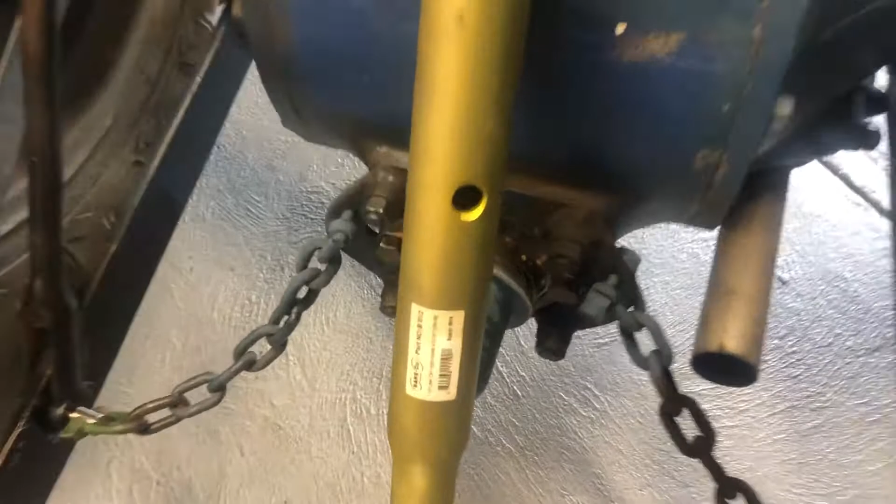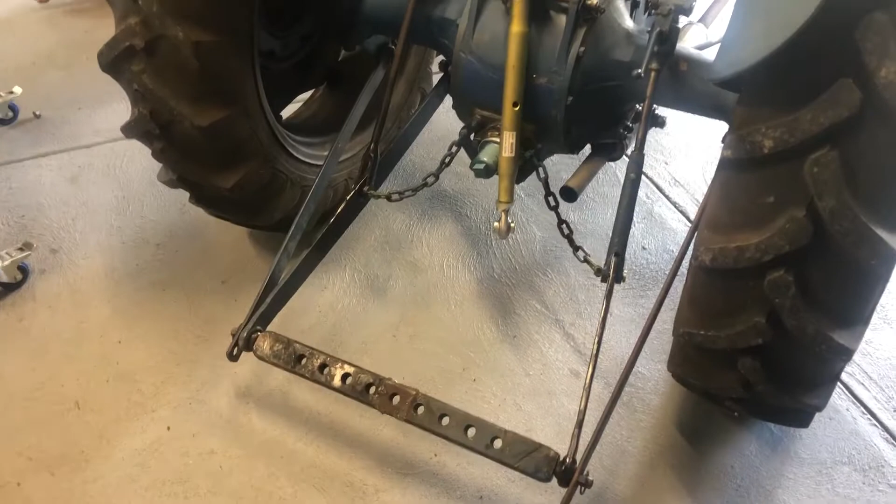At the moment, we're just getting it working. She's running a treat. We tuned it all up, changed the oil, fixed a few leaks, fixed the PTO that was leaking, put a new top link on it, fixed up some of the pins on the 3-point linkage, so it's all working. There's plenty of videos on that sort of stuff already, so I didn't bother filming all of that.

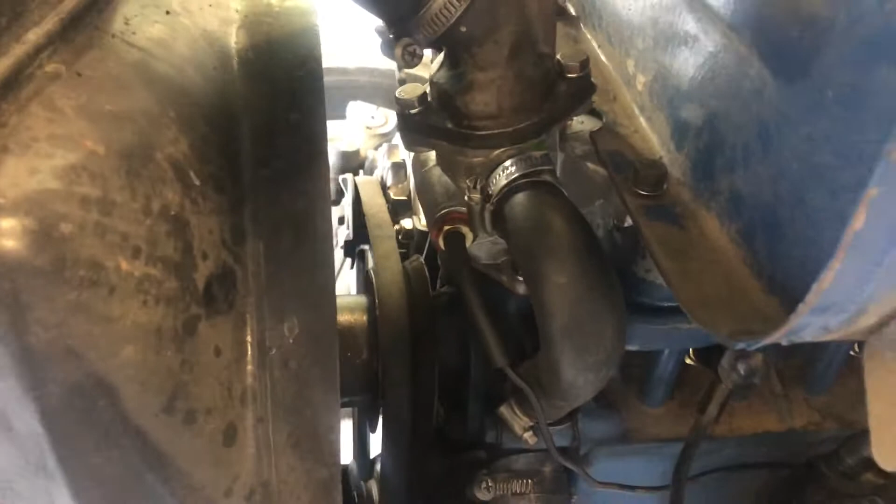Put all new hoses, all that sort of stuff on it, new thermostat housing because it was eaten through. Tuned it up, it's running absolutely terrific.

But what we're going to do is make a carry-all for the back of it, and you can get plans off the internet really easily, and they also give you a list of what steel you need to cut and how to join it all.

So we got all the steel cut up. That's the main frame, the 75mm RHS, and the other bits and pieces that go with it. Bought some pins for the lower 3-point locations. I just got to make the top one.

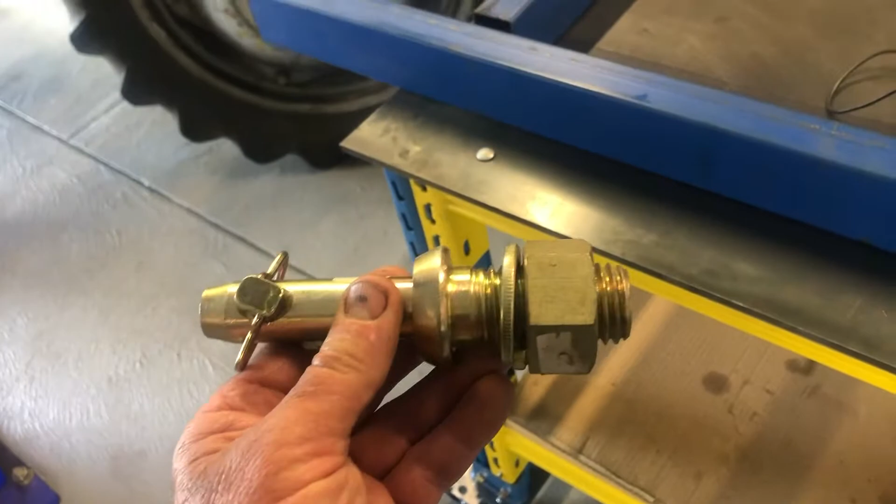So yeah, we're going to follow the plans, cut it all up, weld it all together. I'm no welder, we'll just MIG weld it. We've got the MIG welder there, and we'll make a little carry-all for the tractor.

So here it goes. As I say, I'm no expert at this, so we'll just play it by ear and see what we come up with.

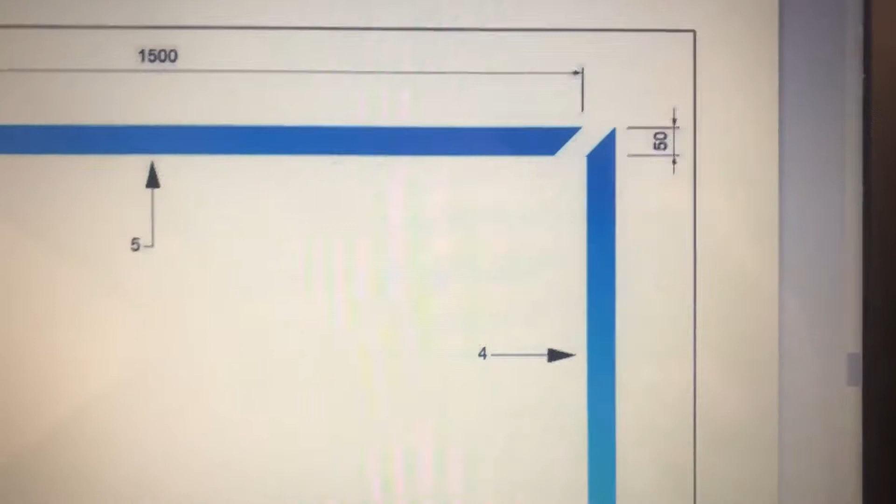The plans call for the 75 by 50mm RHS to be cut across that angle, 45s. So that's what we've got here. Obviously we've got to cut that at 45, cut that at 45. So we'll start by marking it all out.

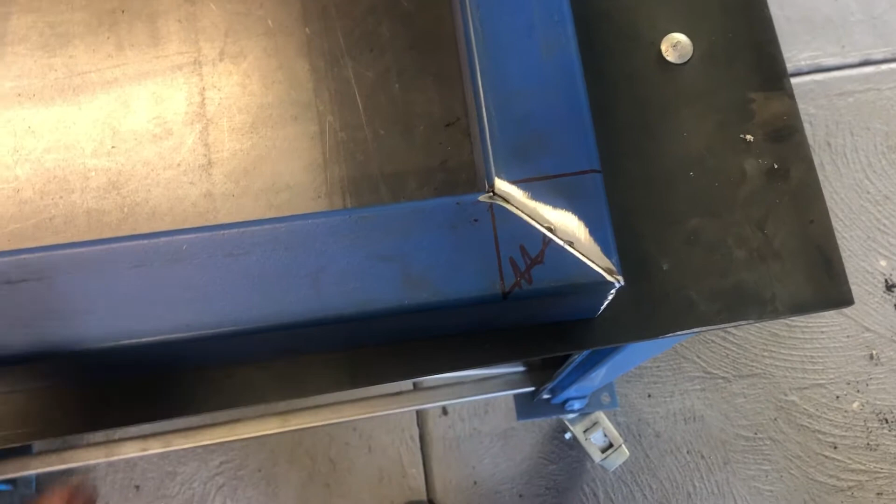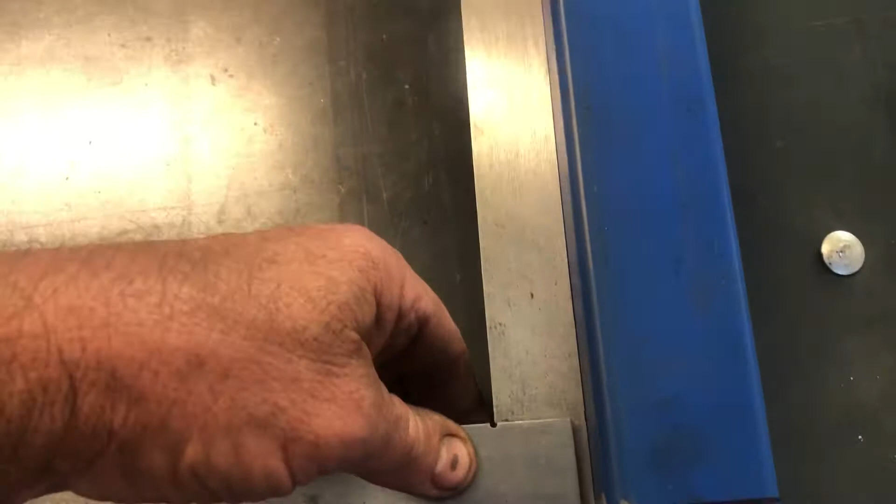Well, that's those angles cut, tubers. Here's an example of measure twice, cut once - I nearly cut it the wrong way. Not that it would have been a huge problem, I just could have turned it over, but yeah, always double check your measurements. I haven't welded anything yet, but it's going to come up fairly square, should be a little bit of a gap there, but we can fill that with weld, it'll give us a bit of penetration. Same thing at the other end.

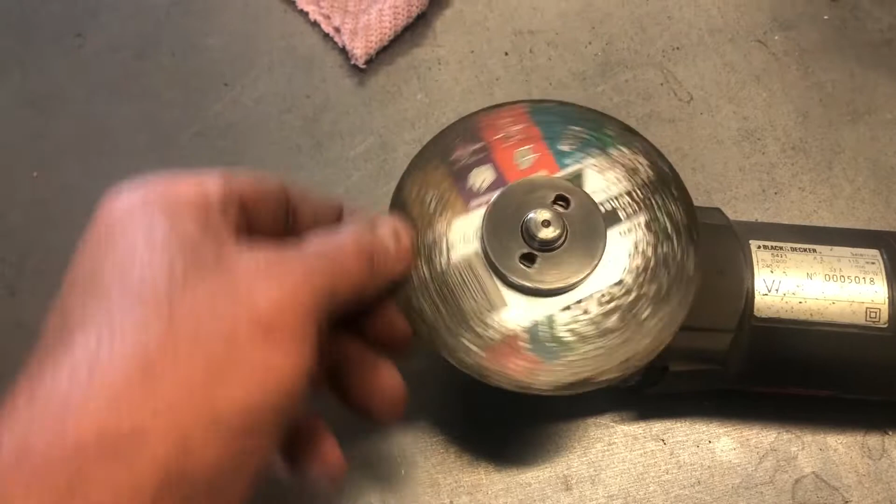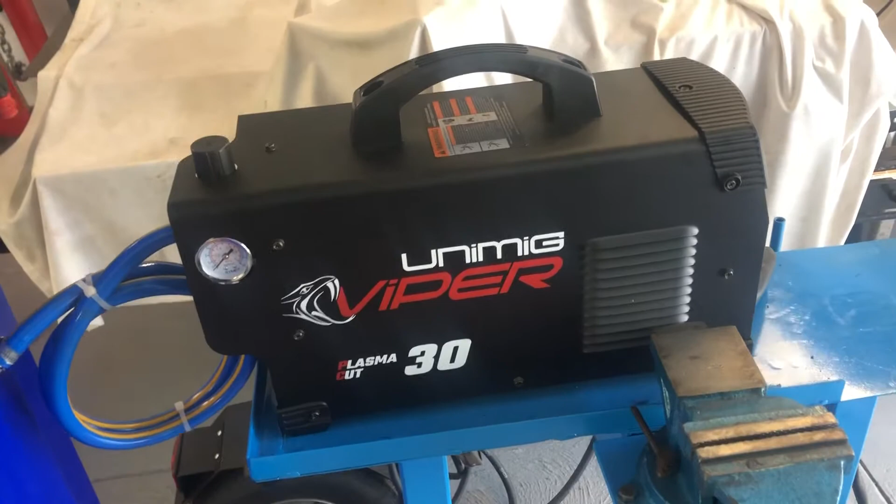All I cut it with was an angle grinder with a 6-inch or 4-inch disc, whatever they are. That's the only thing I've got that can cut steel, other than the plasma cutter. The plasma cutter is fantastic, but you need a pretty steady hand, which I don't have. So I thought I need it to be pretty accurate, I'll mark it all out and do it with the angle grinder - I've got a bit more control.

So we'll go to the plans and we'll see what's next.

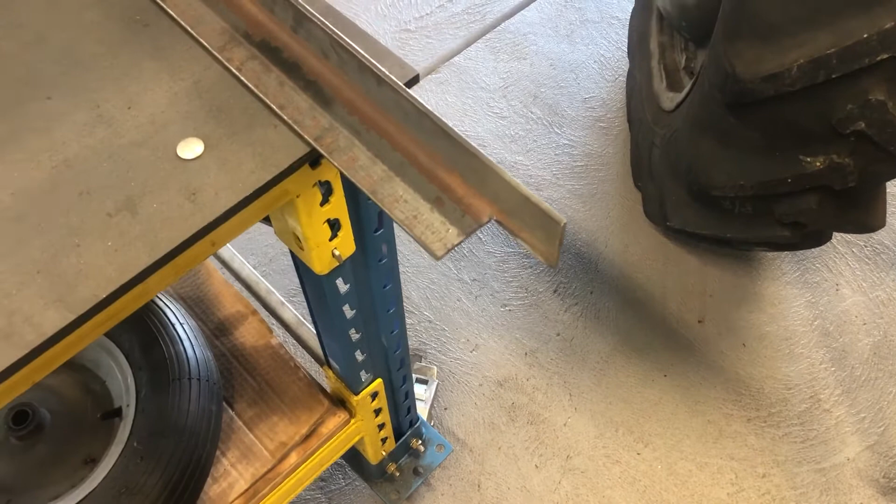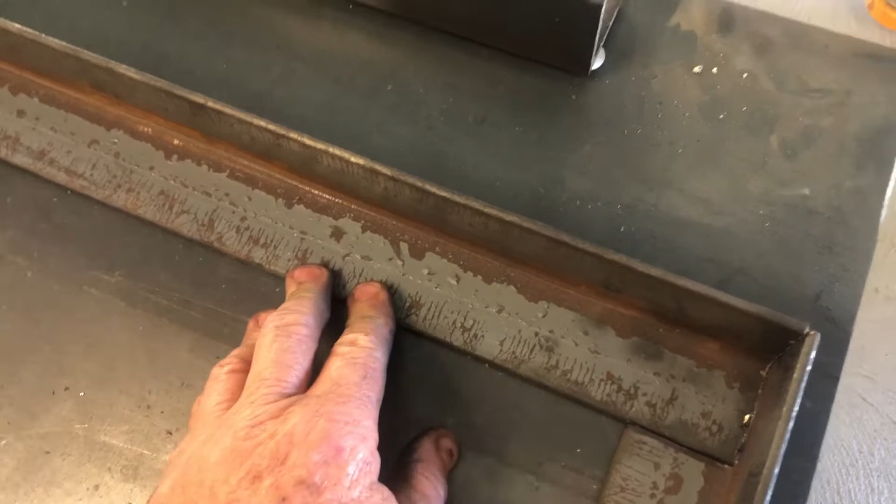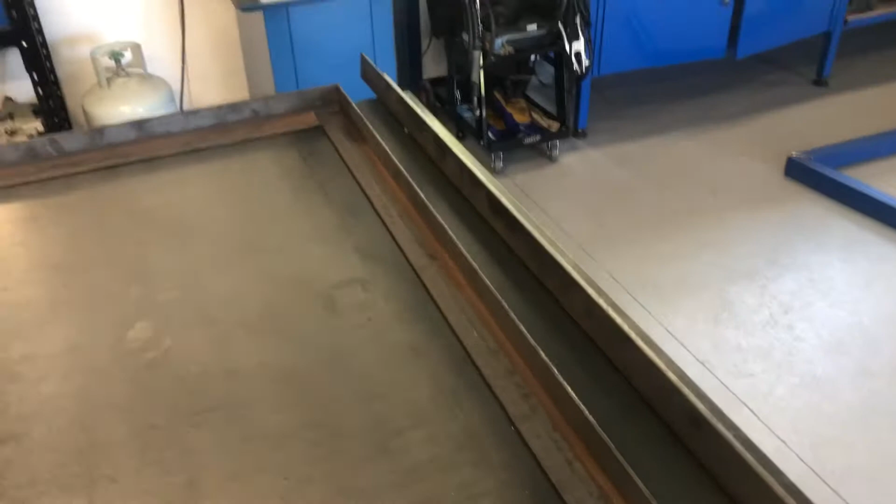Well, that's the angles cut, tubers, and it seems to fit nicely into there - just notches in. These ones were cut at, overall the whole thing's 1500mm, these were cut at 1490. Couldn't figure out why, but when you slot them in, they don't sit in that way, then you end up with a big gap. They sit in that way - that measurement from this outside edge to the other end becomes the 1500. So yeah, just double check all your measurements as usual.

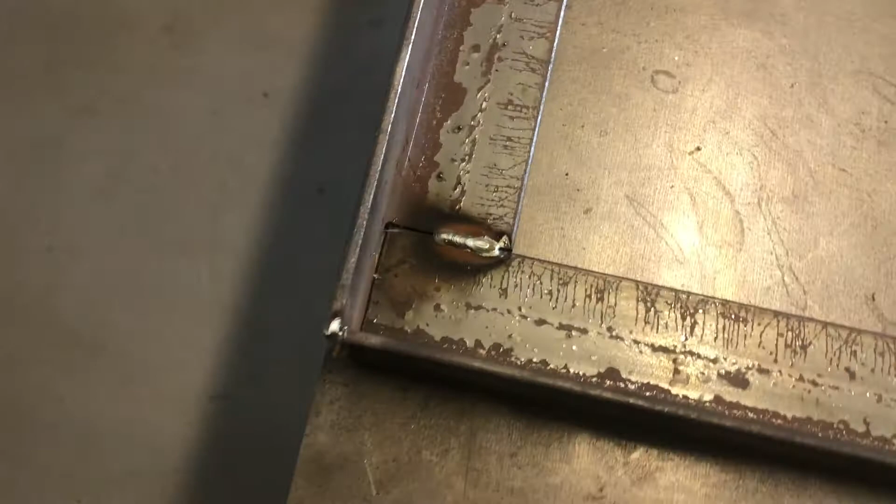Well, that's the base tacked up, tubers. As I say, just tacked with the MIG. I'm no gun welder, believe me, but I can join 2 bits of metal, and that's all we have to do. That'll be hidden anyway.

We've got to make sure she's square. So what we do is we measure from that point right over to that point, and then we measure from that point right over to that point, and they should be the same. If they're both the same measurement, then the frame is square, which I checked and checked and rechecked. Oh, there's a bit of MIG wire.

Tacked it all off, and I reckon she's square. I'll get the same measurement from there to there, and there to there. If you measure it from there to there, and the same on that side, it'll be the same, but that doesn't mean the whole thing can't be like a trapezoid, whatever they call them. It can be out of square still. So that diagonal measurement is critical if you want to get everything straight.

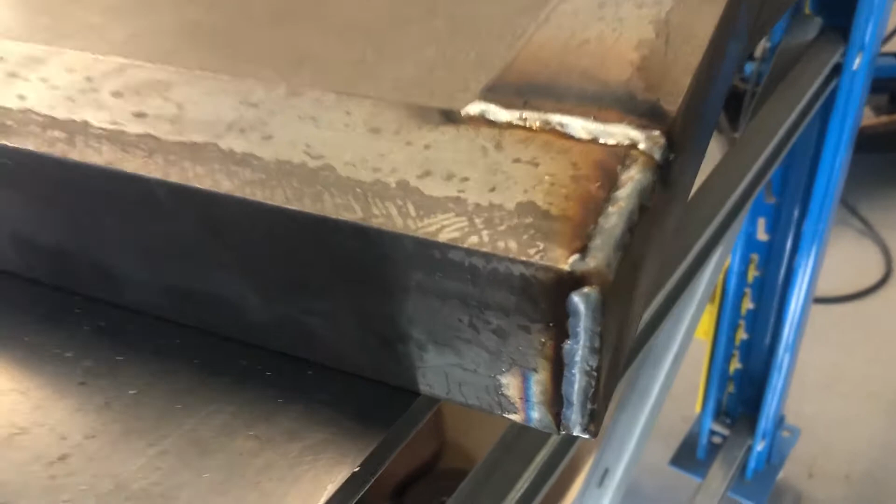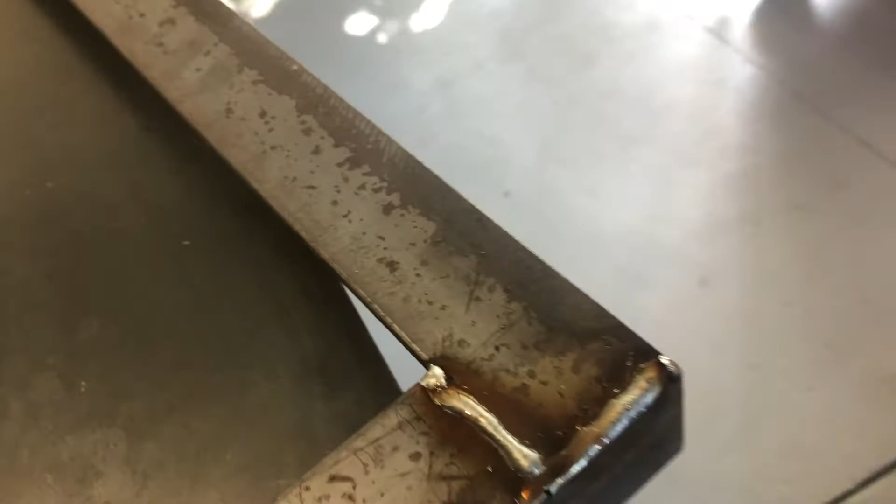Well, that's the bottom welded up. Like I say, I'm not the greatest welder on the planet, but I get the job done. I'm still struggling with how many amps, how many volts, and how much wire speed, but at the end of the day it's joined, so that's good enough, I suppose.

The plan now calls for the 2 bits of flat to be welded on the bottom and stepped over this side by 75mm. They've got to stand up like that.

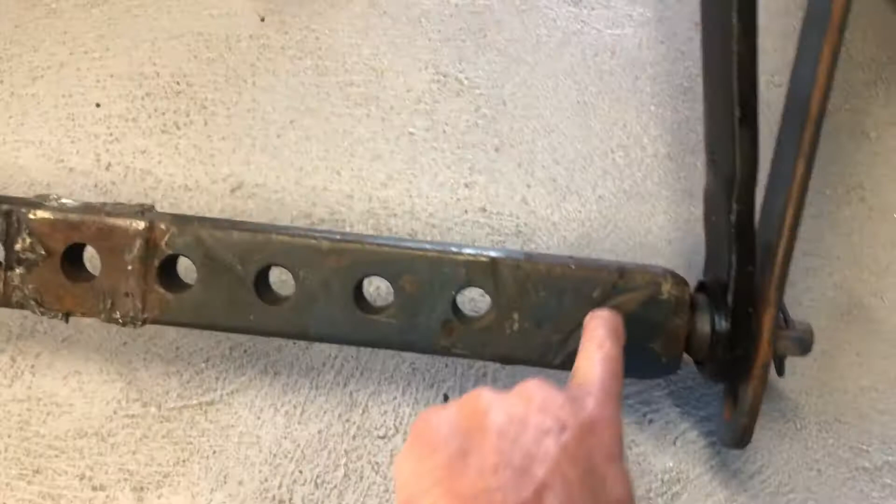These also have to be the same distance apart as the 2 lower points on the 3-point. The plan says 750mm, but I get 660 across those two, so I'm going to make them 660 apart, and hopefully that should all work out with a bit of luck.

As I was saying, these 2 bits of flat go across the base - this is the bottom of the tray, or whatever you want to call it. The plan doesn't call for it, but I've notched these 2 bits of flat so it sits even with the underside of the floor. So when the floor goes down, it sits right along that edge. I've done that to both of them.

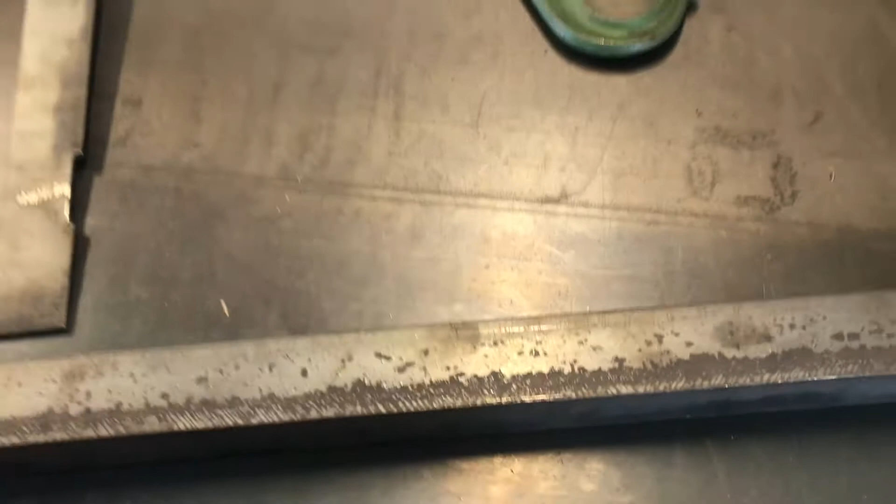We'll just work out our spacing now. I've double checked it - it's 660 on that lower 3-point. We've marked a centre, which is right there. So I figure if I go 330 that way and 330 that way, that should give me the 660, all being well.

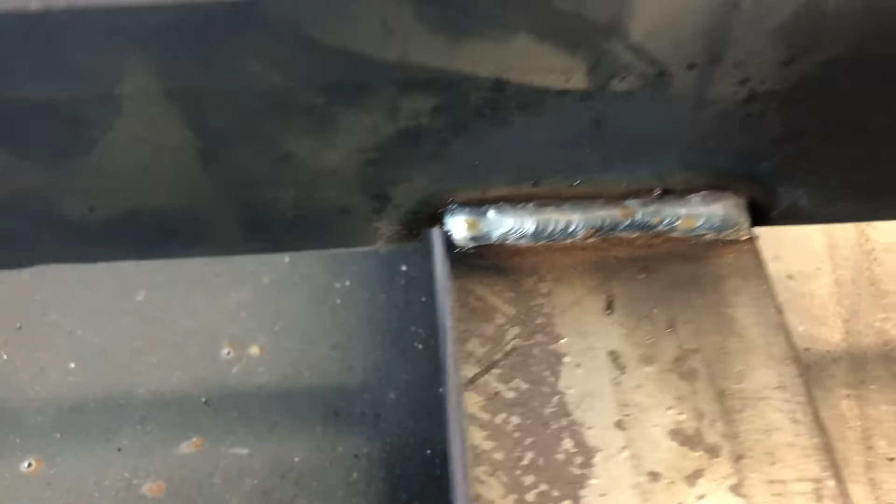Well, that's the base finished. It's all welded right round, and these braces are put on. Not a bad weld - it'll hold. I wouldn't want to trust it to a deep sea diving bell or anything like that, but for a farm implement it'll be just fine. So that can go on the ground and we'll start on the next bits.

The plan now calls for the backboard, the upright bit, to be tack welded. We cut all those the other day, so we're just going to tack weld them a little bit, just in the corner there somewhere.

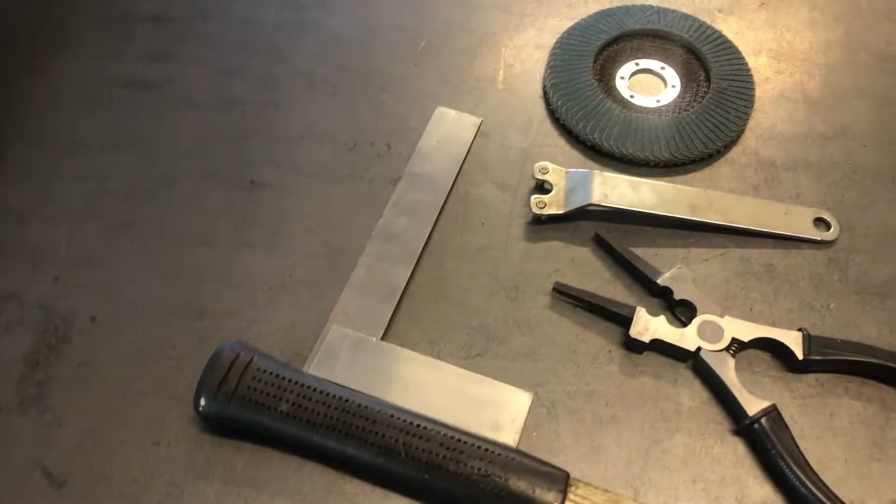We've got the square or the magnet on, and we've also checked it with the square, and it's come up beautifully at this stage, so that should be all right. It all looks nice and flat. We'll just give it a little tack and do the other side.

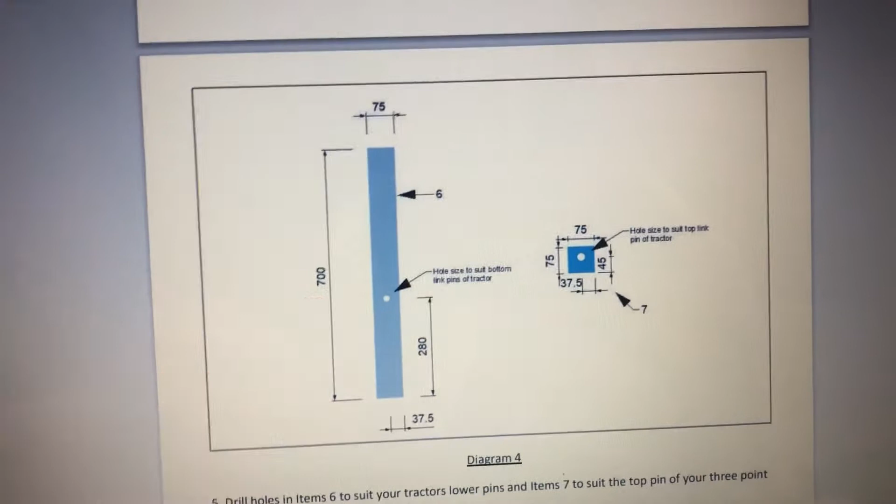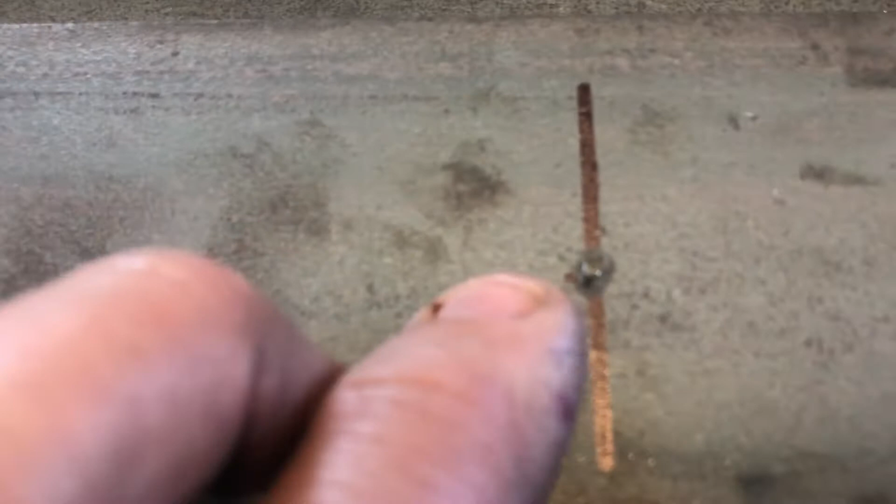The plan now calls for us to do a little bit of drilling. These are the holes for the bottom 2 pins for the 3-point, and that's the one for the top - 2 of them and 2 of the bottom ones. On our bit of 700 by 75, come up 280, which we've done, and coming 37.5, which we've done, and centre punch it, and then we'll be drilling it. So just double check your measurements as usual.

We've got our first piece of the flat set up in the mill. Just got to centre it all up there, and we've got to do a pilot hole first. We've got to do a 28mm hole - that's the diameter around there, 28mm. So I've just got a hole saw to do that. Should be all right, I'm hoping.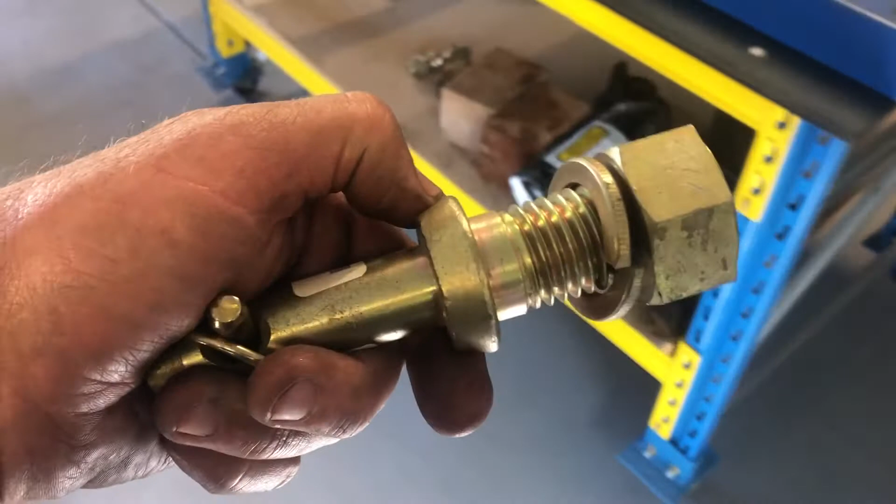It's only mild steel, so a drill bit for 28mm is about 50 or 60 bucks, and for something I'll probably use once, it's a lot cheaper just to buy a cheap tool and hope it does 2 holes. So anyway, we'll see what happens.

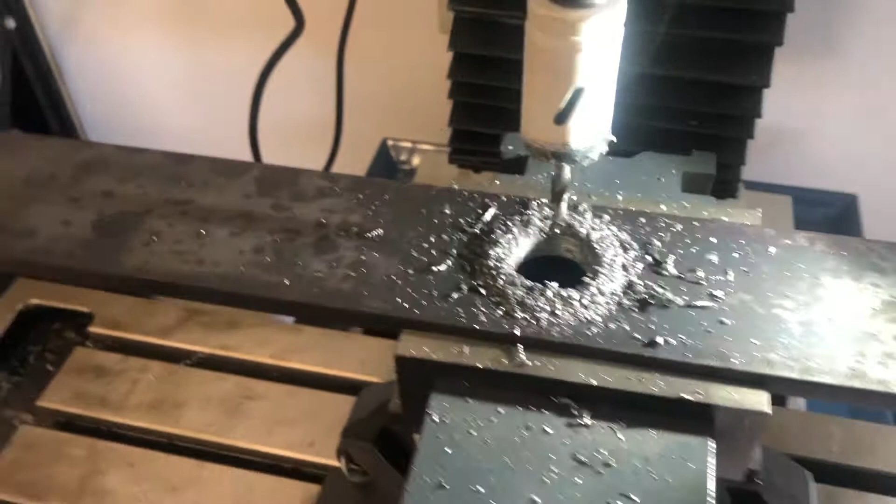Here's our hole saw, tubers. I've just scratched the surface. I'll put a little bit of spray on it as I go. I won't be able to film it because I need two hands and I haven't got a tripod, so we'll see how we go. Well, there we have it, tubers. One 28mm hole. Well, it's probably going to be a little bit bigger, but that'll be okay. We can work with that.

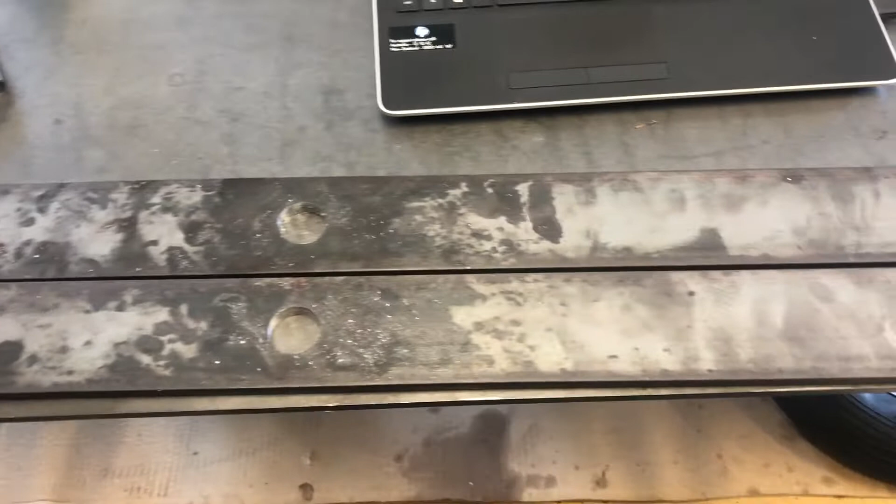Well, that's those two holes drilled, tubers. Yeah, we'll keep going. Well, that's the top pin mount holes drilled, tubers. As it says there, I measured the top pin. I got 19.5 for the pin. They're 19. I may just have to relieve them just a little bit. If I went 20, it'd probably be too big. And I'm trying to keep as much slop out of all this worn out 3-point linkage as possible. So anyway, if we have to file it out a bit, that'll be fine.

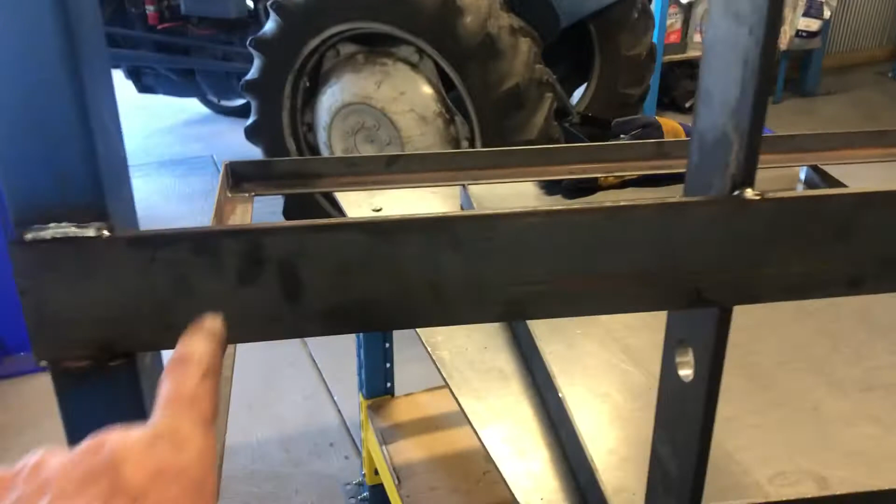Really starting to look like something now. Tubers, the other bit of 1.5 metre flat just goes across the back. And the two uprights go in with the holes to the lower side for the 3-point. And then just basically weld it up. There's no big secret in any of that. Just once again check everything for square.

Yeah, all we've got to do is put these two straps on the side somewhere like that, just with a tack of weld, and we're basically finished. And then we can give it a trial run. Oh, I've got to put a floor in it too. I've ordered some aluminium checker plate. Not polished, just normal aluminium checker plate. Probably look pretty good, and it'll be quite durable.

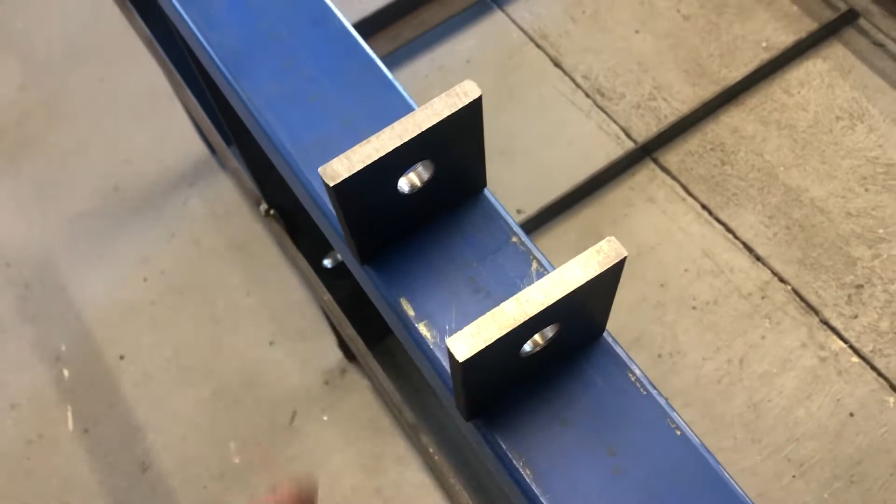Well, that's those side straps on, tubers. I didn't really look to see if there was a measurement for them, but they just sort of look about right, and they look the same. All that's left to do is put the mount for the top pin on, and we just got to find the middle from that point to that point. So if it's 1500 long, that'll be 750 mil. Work out the spacing, weld them on, and she's basically done except for the floor and paint.

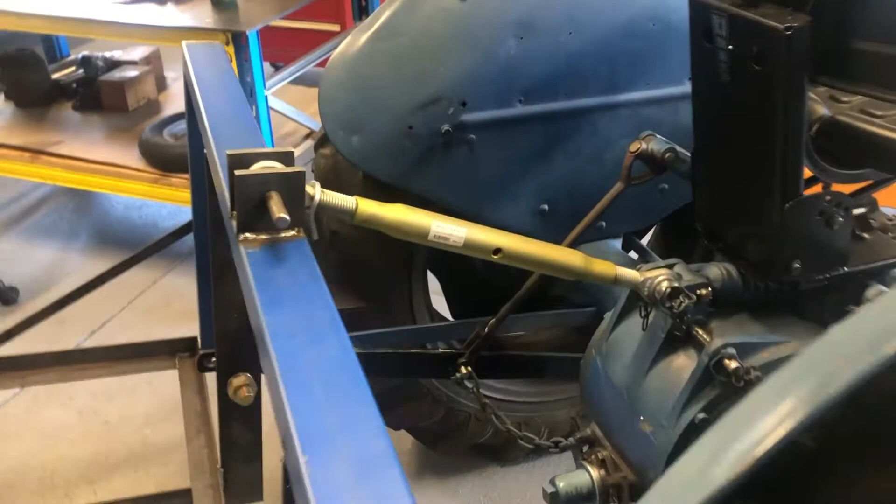Well, that's those welded on, tubers. Hopefully it fits in that top link. Other than that, she's done, as I say, except the floor and paint. We'll hook it up now and try it out anyway and see what happens. Well, believe it or not, guys, the carry-all actually goes up and down. The hydraulics are working, and it takes my weight and another, so it'll take at least 200 kilos. It's probably good for 500 or something. I wouldn't have a clue how much, half a tonne, something like that, but so far so good.

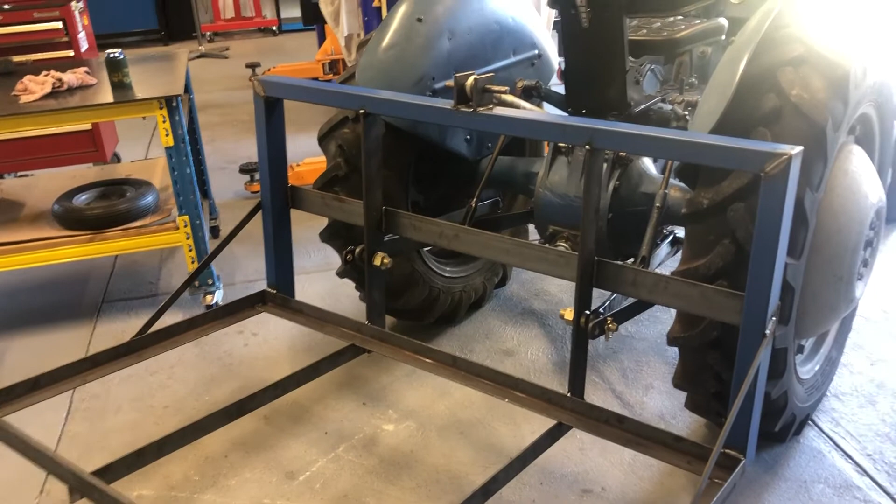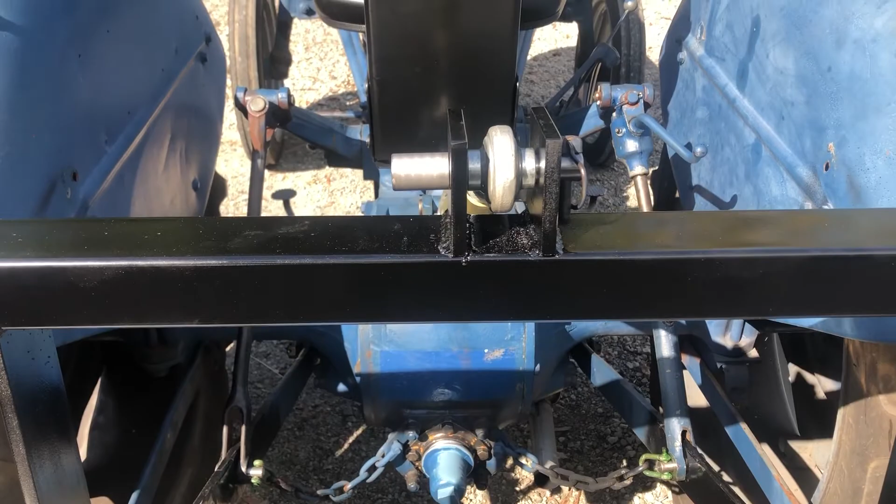Well, there we have it, tubers. The carry-all is basically done. Got the checker plate, fits beautifully. Just got to be bolted in. I've got some bolts for that. Pins are all done. Made a top pin on the lathe, so that fits nice. She's basically done. Come up looking all right. I mean, it's not too bad at all. When I restore the rest of the tractor, it'll look a million dollars.

And of course the final touch is the countersunk Allen key bolts. M8 I think was the size. We also used nylock nuts. So it's got a flush finish on top, and they're stainless bolts. It goes really, really nicely. It's for use, so it's not going to stay clean too long, but what does it matter?

Having said that, I take no credit for the plans or anything like that. It is all someone else's work. So don't come saying that Mick designed it, because he didn't. It was readily available off the internet.